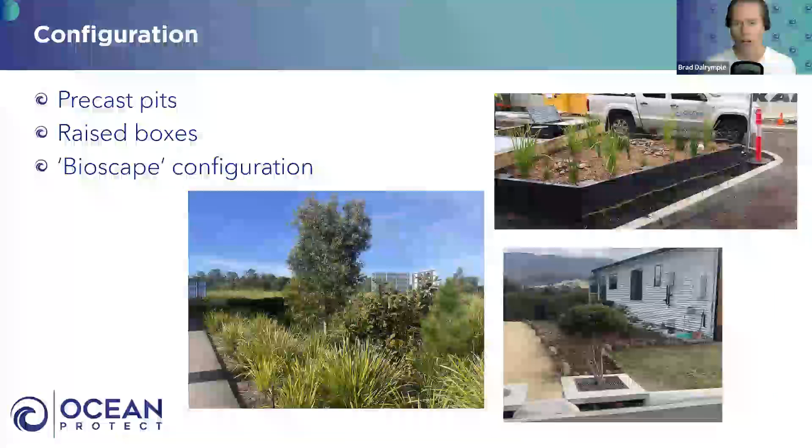But yeah, key difference is fundamentally they're just smaller, 3 to 5 times smaller in general. In terms of application, basically wherever you'd put conventional bioretention systems is more or less a suitable site for Filterra bioretention. There's just some examples here, and I'll show you some more in a sec. Configuration - like I said, there's the tree pit systems, the bioscapes. We also occasionally do a sort of raised box as well.

So fundamentally, most councils across Australia allow their use, at least on private sites, and several allow them to be used on public sites as well.

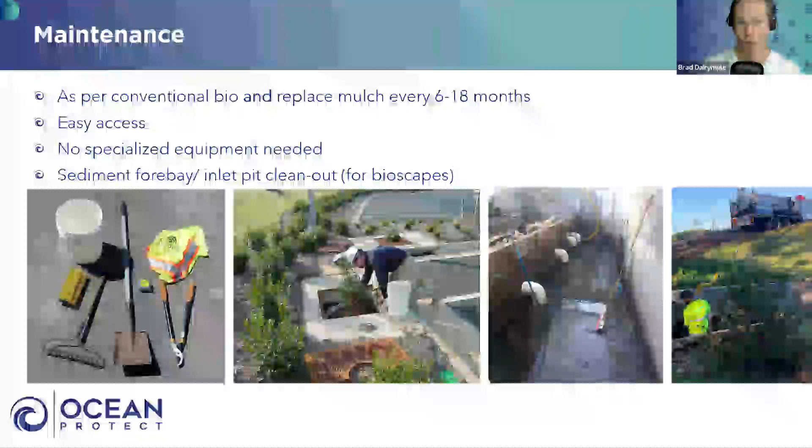In terms of maintenance, it's really quite simple - in fact, I'd say it's actually easier to maintain than conventional bio. And again, I'm biased, but firstly, they're smaller, so the work area is 3 to 5 times smaller. They're generally easy to access, but you don't need any specialized equipment or Ocean Protect involvement to maintain these assets. They can be done by any suitably qualified people.

The key maintenance activity is basically just giving the mulch a replacement. We recommend that every 6 to 18 months, but again, it rarely happens that frequently, at least.

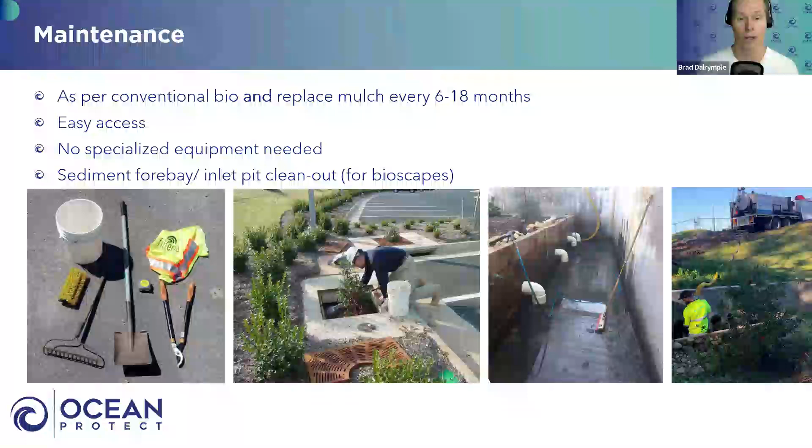And giving the vegetation a bit of a haircut as well. I'll show you some examples of what that looks like in a sec. Obviously, I don't know anything about haircuts - if you need the back of my head as an example.

In terms of case studies, there's a lot of them now, over 200 in Australia. But it's worth noting this isn't new technology - Ocean Protect have been doing it in Australia for about 6 or 7 years, but in the States they've been doing it for about 15, 20 years, and there's a lot of systems there. I'll show one at the end.

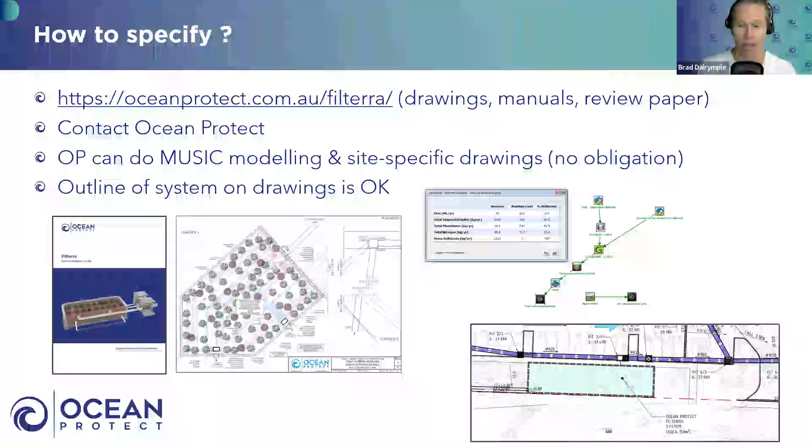So that's a crash course in what Filterra is, but I always like the proof to be in the pudding. I far prefer showing real world examples to give you guys a better feel for what these systems look like and how they function. So I'm going to start with the older systems first.

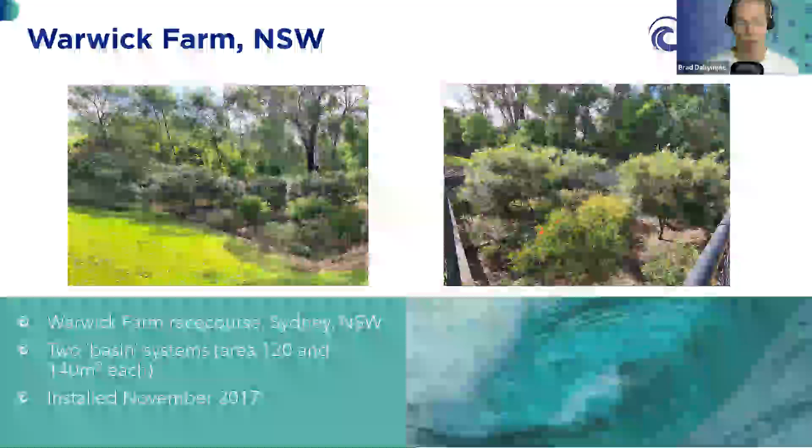Warwick Farm, out of Western Sydney - these were the first installed in Australia, nearly 8 years ago now. There's two of them, 120 and 140 square meters.

Planted out in January 2018. A couple of years later, these plants have just grown and grown and grown, and this is what it looks like very recently. I might zoom back because you can't actually see into it anymore due to the plant density.

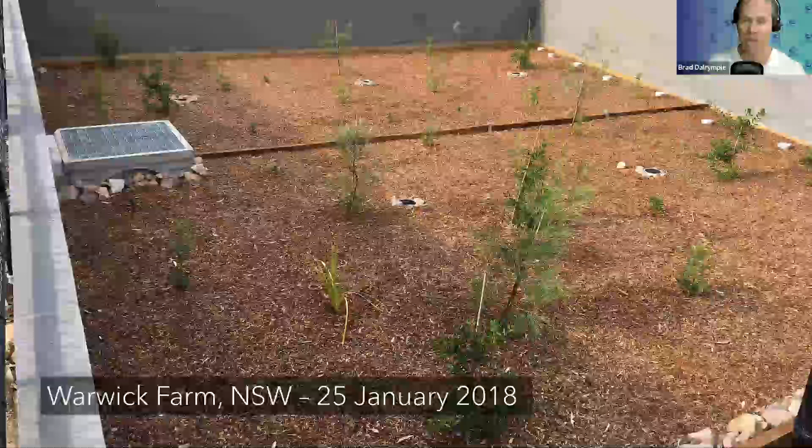Generally we prefer a combination of small plants like grasses and trees, and the planting density is lower than conventional bio systems. You can see here, the planting density generally doesn't go more than about 1 plant per 4 square meters, and there's a bunch of reasons for that.

Number one, we have very little plant die-off in our systems. Number two, we like to give the plants room to spread out and grow. And number three, we want to get in there and have the ability to remove the mulch and put new mulch down.

Having said that, I don't believe this one's actually had any maintenance for several years, but again you can see the plant growth - it's pretty high. So plants are living their best life.

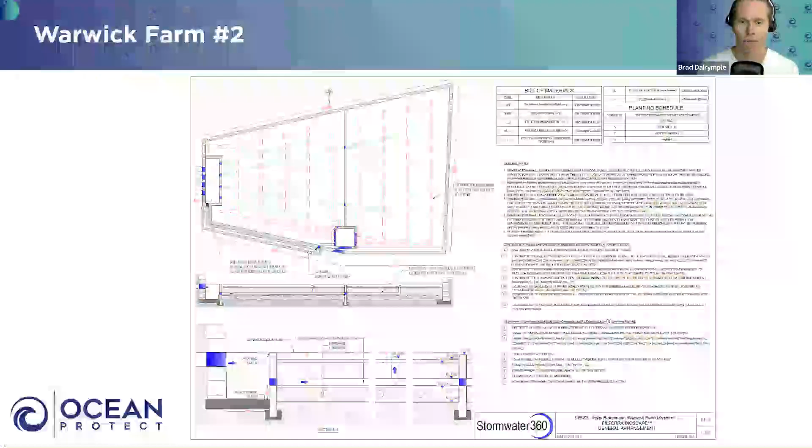This one has actually been hammered, not from stormwater, but floodwater. This is right next door to the Georges River, which overtopped in a flood event and deposited about 1 foot of mud across the entire mulch.

The maintenance intervention was really just removing the mud and removing the mulch. We did a hydraulic conductivity test and showed that the system was still draining really, really well. This highlights the importance of that mulch layer to help protect the system and maintain its longevity. Again, some of these trees are just pretty impressive.

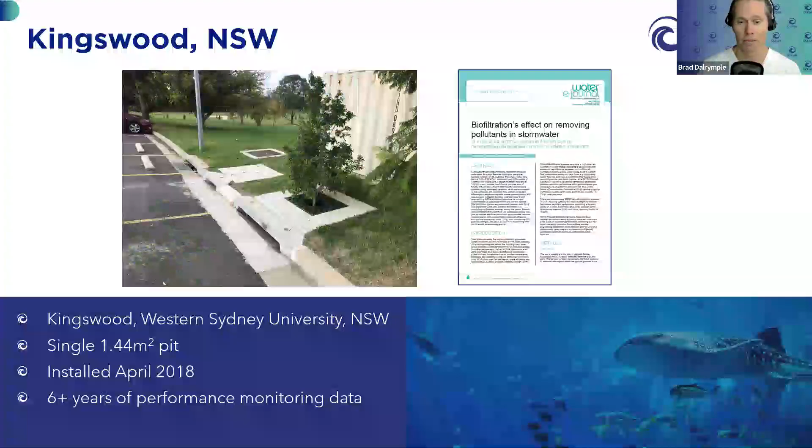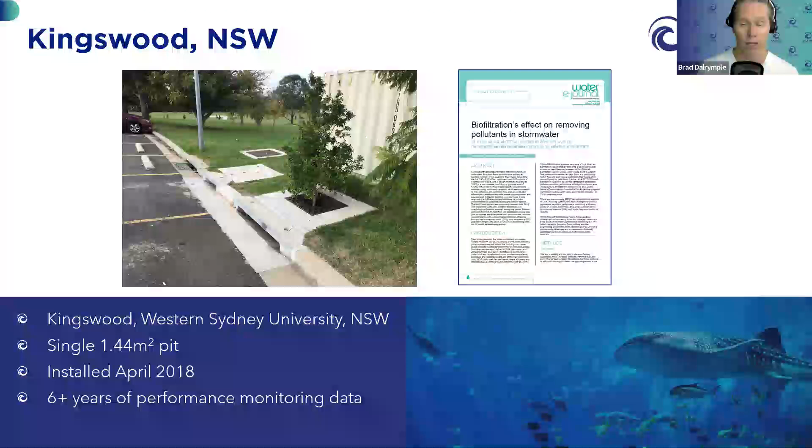It hasn't really had any maintenance apart from that flood recovery. Kingswood, this is a system that's been in the ground for over 7 years now. This is one we've done a whole bunch of performance monitoring on. We've monitored this for 7 years now. This is one we submitted for SQIDEP approval, and it's had study results published in the journals. But fundamentally, this is what it looked like when we were installing it.

That is the Filterra bioretention system. There's a little cutout in the curb there, and you can see water just drains into it, just like a streetscape bioretention system. In that cabinet, there's a whole bunch of fancy monitoring equipment.

In terms of maintenance, I like showing these photos because it shows you what maintenance looks like. When we remove the mulch, the key reason we do that is because that mulch will capture a lot of silts and fines that can otherwise block the filter media. It also has a whole bunch of pollution, which ideally we don't want just sitting in there forever. So ideally we remove that mulch and place new mulch down. You can see here the tree has got a bit of a haircut as well. Just to give you an idea of a small scale maintenance intervention.

And that's still going gangbusters. I think we're still monitoring that 7 years down the track. These are some of our bigger systems, and these probably are getting more and more common. These were installed about 5 years ago.

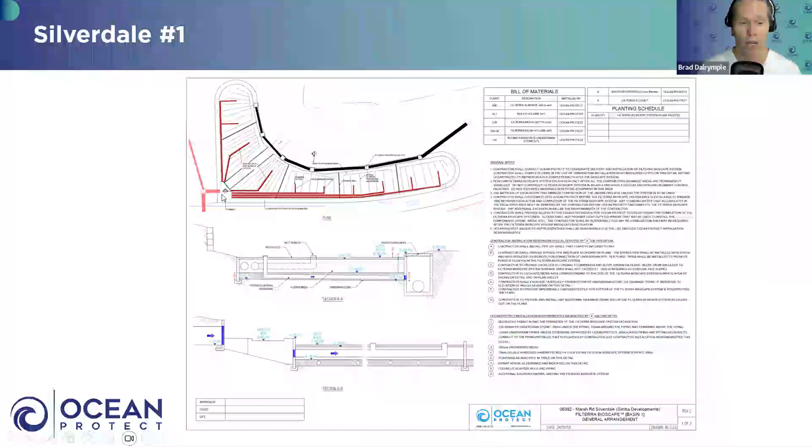Design drawings, again, done by Ocean Protect. You can see some of the features here. This is a 500 square meter system. You can see that this is a bioscape separated into individual cells, generally less than about 9 square meters. The red lines show the bubble up flow distribution points. This is a coarse sediment forebay to help mitigate sediment loads, and this little channel here is the high flow bypass as well.

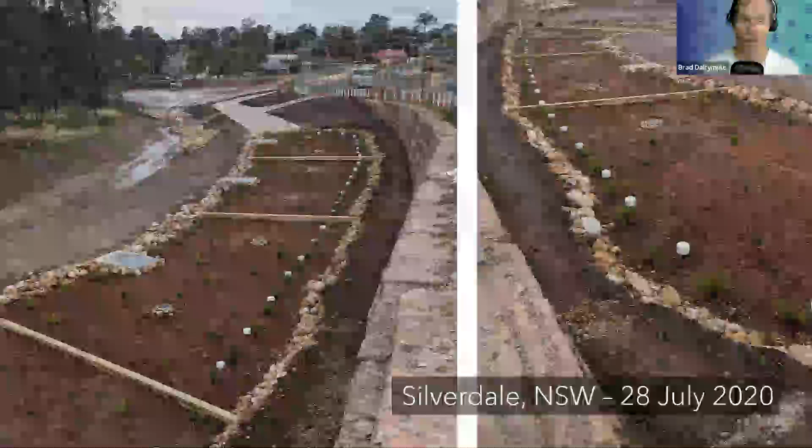Just to give you some photos of what they look like day one - so this is day one installed. You can see overflow pits, the bubble ups, dividing walls, flush points, the mulch, plants, and over time. Keep in mind, this was originally specified as a conventional bioretention, 5 times bigger than what the Filterra ended up being. The developer went with Filterra because it meant he didn't actually have to cut down a whole bunch of adjacent bushland as well. Over time, this system's just grown and grown and grown and grown. You can see the bushland over here that was basically stopped from being cut down because the Filterra was so much smaller.

You can see here some of the features: bubble up points, overflow pits. This is the high flow bypass, and this also shows the plant density. We planted 1 plant per 4 square meters on this system. Conventional bio, you're often looking at 6 to 8 plants per square meter - so the density here is substantially lower.

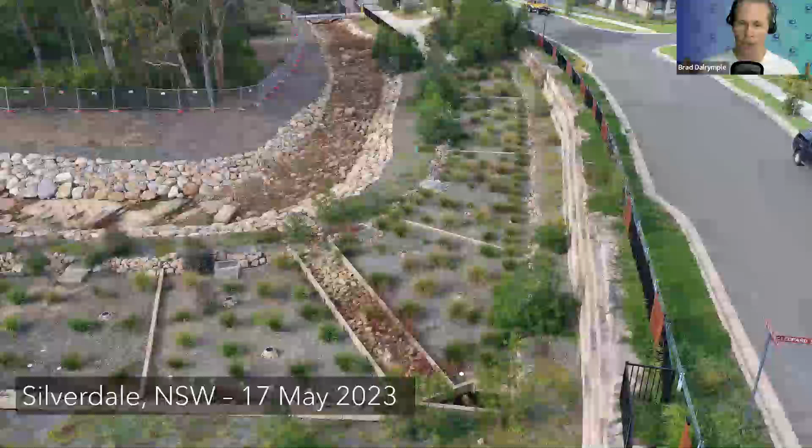You only appreciate that if you get an aerial photo, but if you actually look from the side, you can see the planting density is actually probably, visually, still quite dense. The plants have had very little die-off, I'd say almost zero. In fact, some of these plants are actually self-seeded - that tree we didn't plant, that's just come in from, I don't know, a bird dropping a seed somewhere. You can see what 1 plant per 4 square meters looks like. It basically gives the plants plenty of room to spread out, but equally, if someone wanted to get in there to replace the mulch, they could.

This one is - and I know Alan West from Kingston Council, I saw you dial in before. Greetings, Alan. Alan's the champion of this project. Kudos to Alan for trying something new, because I know Filterra is a new thing in Victoria.

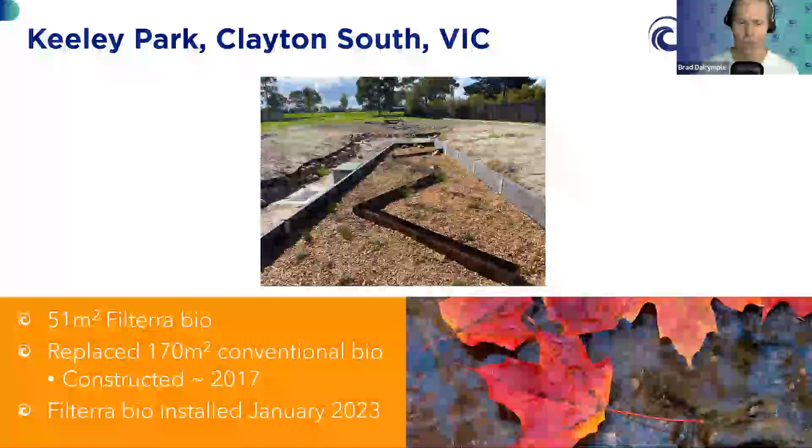Alan obviously heard about Filterra, and long story short, there was a conventional bioretention system that had been installed that just wasn't operating as well as Kingston Council would have liked. It had only recently been installed - I think it was installed in 2017, but a few years later was really struggling with some operational issues. So Alan and Kingston City Council took the initiative of trialing a Filterra bioretention system. We basically took the 170 square meter conventional bio and used a portion of that, about a third, 51 square meters, and made that the Filterra, and the rest was just landscaped.

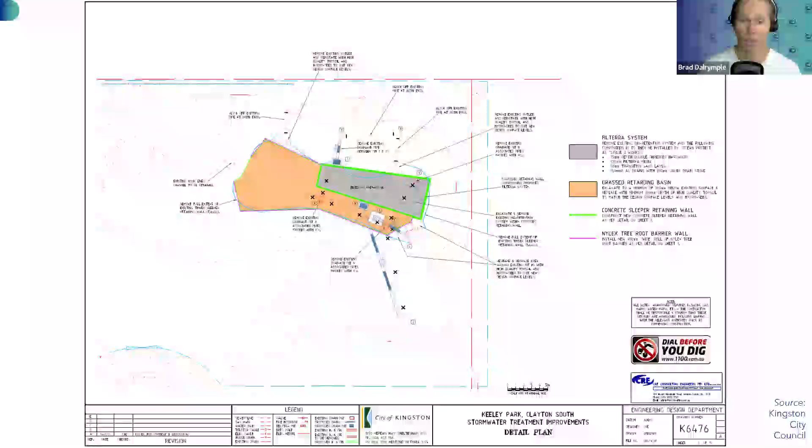This gives you an idea of just the construction - this is kind of what we do.

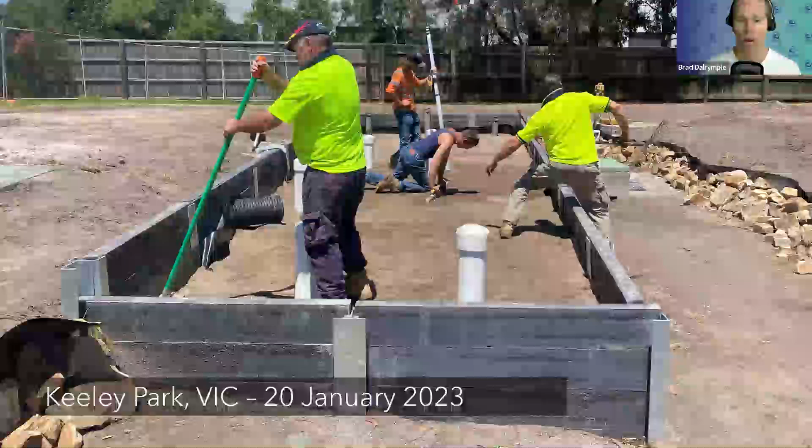So as part of any sort of system, we get in there and actually design and install it ourselves with our own crews. That's day one. In 2023, and this is a little bit later — fundamentally, Alan and Kingston Council preferred the trough flow distribution system, modelled on the conventional bio-system in the Edinburgh Gardens in Fitzroy.

This is just another way of getting flow across the surface of the bioretention system. Instead of a single inlet, we're trying to distribute water across the system, like we often see with conventional systems, really trying to maximize the full treatment extent. You can see in the background all this adjacent area is used for landscaping. Looks great — a great project, with more to come.

The water is treated and then used to irrigate the adjacent sports fields, which is great — there should be more of it. Well done to Alan and Kingston Council and the Ocean Protect guys involved in that project.

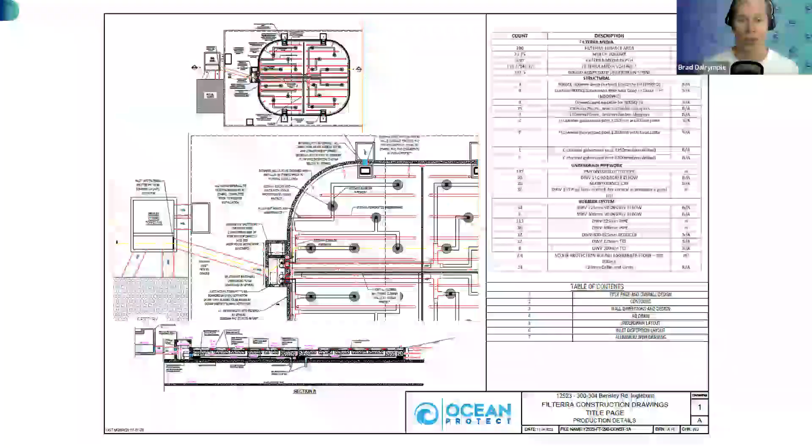This one's a bit different — installed in 2023. This actually sits on top of a detention tank, so water basically drains through the Filterra system and discharges directly below it into an underground detention tank. I like this photo because it shows the system getting built, with all the different stages of the Filterra bio installation visible.

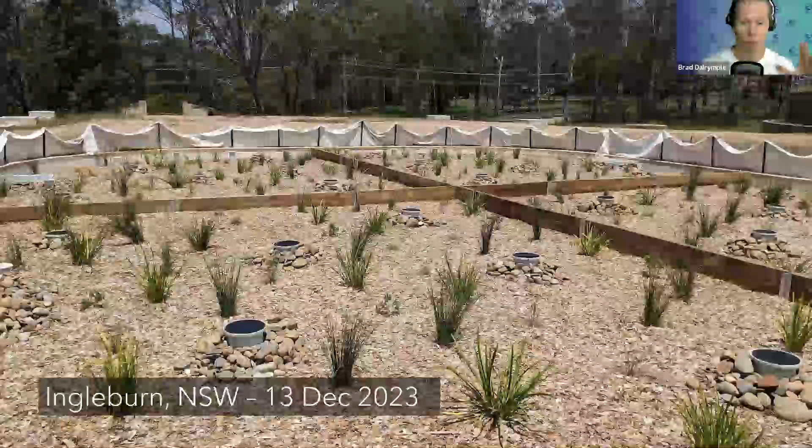We haven't actually brought this system online yet because the upstream catchment is still undergoing construction. Again, that's a great advantage of having these systems offline — we can ensure the system is protected from incoming sediment loads that can otherwise damage it, which we see in conventional systems. This next one is hot off the press — brand new.

This is a really interesting one in Littlehampton, South Australia. It's 120 square meters, and it treats stormwater but also treats recirculated lake water. There's an adjacent lake as part of the development, and to help protect lake water quality, the plan is to recirculate lake water twice a week for about 4 or 5 hours each time — so about 8 or 9 hours of pumping weekly, just keeping the lake turned over. That water goes through the Filterra bioretention system to help protect lake water quality.

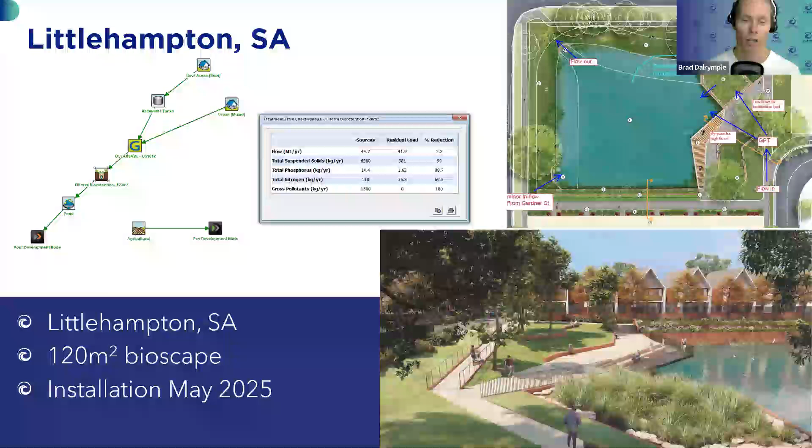But if it rains, the Filterra system also receives and treats incoming stormwater from the upstream catchment. It's actually modelled on a system we trialled that's still operating on the Gold Coast, installed back in 2018, which was purely treating recirculated lake water — and it's still going strong.

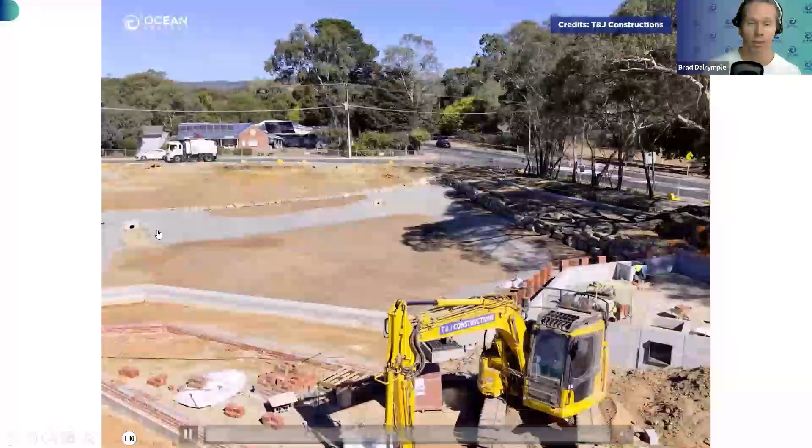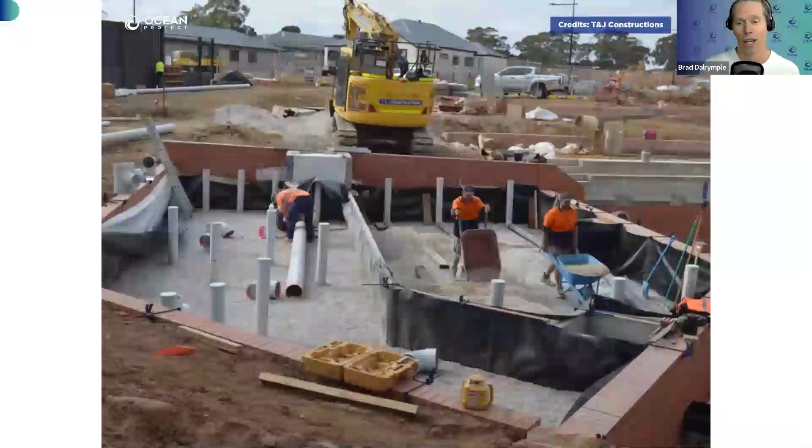This is some fancy footage from the construction — not sure how well it will come off on the webinar, but you can see what the guys do: installing the gravel, the under-drainage, the bubble-ups, the filter media, and the plants. Again, this is offline while upstream construction activities are still happening. That's day one, and the lake hasn't even filled up yet — a really cool project, and it'll be interesting to see how it evolves over time.

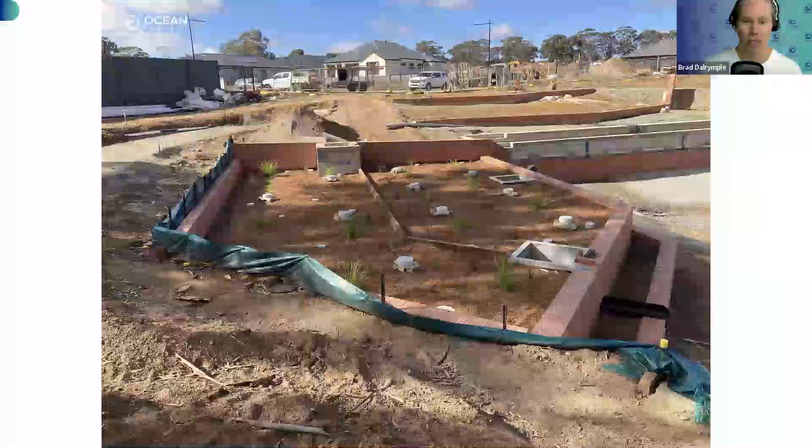A couple closer to home now — these ones are a little closer to my heart. Number one, because I helped build them, and number two, because I check on them every so often.

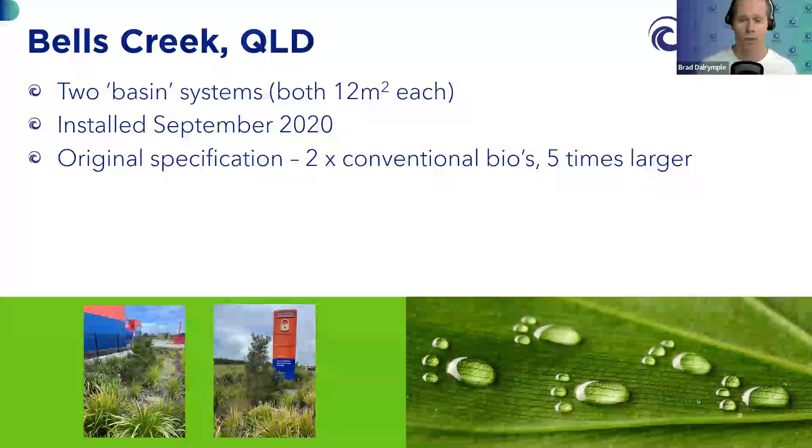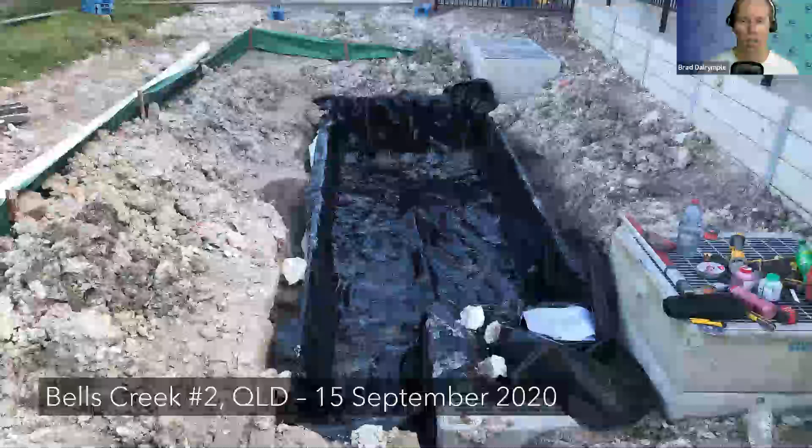Here's the install crew coming through and essentially installing the system — this is basin number 2, putting in the liner, the gravel, and the filter media. That's day one. So that's it — what's that, nearly five years ago now? Keep that image in your head.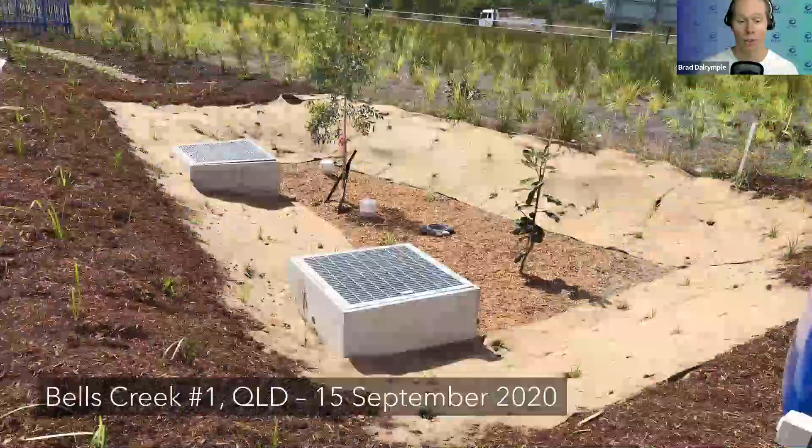This is the second system out there. Again, day one, and a few years later, and now 5 years later, the plants are really well established. So that's it, day one, and a couple 5 years later, the plants have grown up really nice and tall. So the key thing for me is that plants love growing in Filterra bioretention systems.

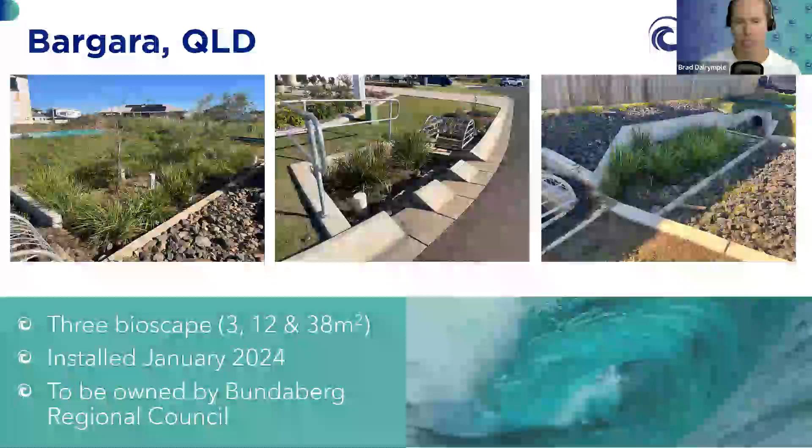A little bit further up the coast near Bundaberg and Bargara, beautiful part of the world. These will be handed over to Bundaberg Council. So these are three little systems, and it gives you an indication of the different types of Filterra bioretention systems. One's a bigger bioscapes - that's it, day one installation.

And that's it, a year later. Again, still offline because the upstream construction activities are still happening. And then we've got these two smaller systems as well that have been brought online and are receiving flows. This one, the property owners actually integrated a nice little garden bed adjacent to the Filterra, which is pretty cool - that's the garden bed in the top right there. We didn't plant that one out, but it looks cool.

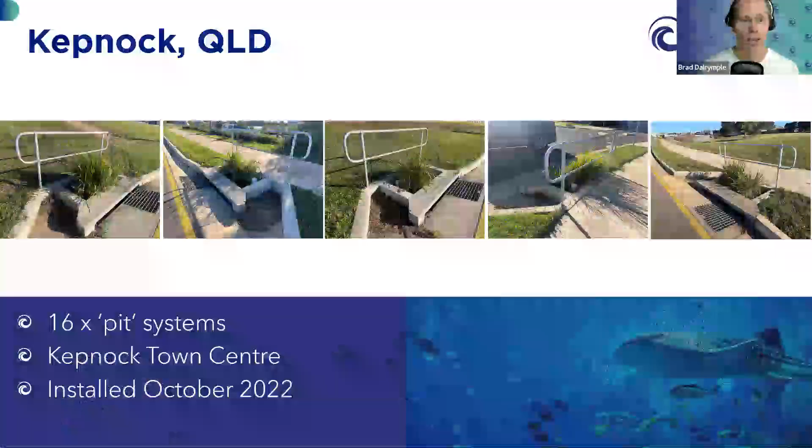Kepnock, just very close to the Bargara systems - these are just 16 individual systems, like little pit systems integrated into a town centre to help protect the water quality from a busy little shopping centre precinct.

These are really new - again, these were installed recently. This is the biggest ones we've installed to date in Queensland. Two systems, 192 and 296 square meters. I did the calcs - they were going to be 4.2 times bigger if it had been a conventional bioretention, and they physically just couldn't fit in.

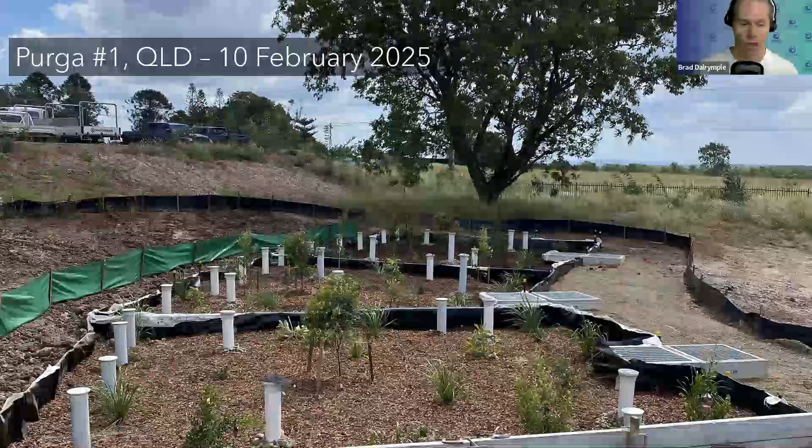So this is it, more or less - this is the first system, basin one. Day one install, so the bubblers and plantouts hadn't been cut back, and that's a little bit later on, and that's just a couple of weeks ago. This is getting a lot of flow - they're actually heavily saturating the upstream catchment, so this is getting pretty much a lot more flow than we actually anticipated, but the plants are growing really well.

This is the second system, just under 300 square meters. So again, day one installation, and more recently activating the system and bringing it online. Again, diversity of vegetation, shrubs and trees - pretty much the same planting palette that you'd put in a conventional bioretention system.

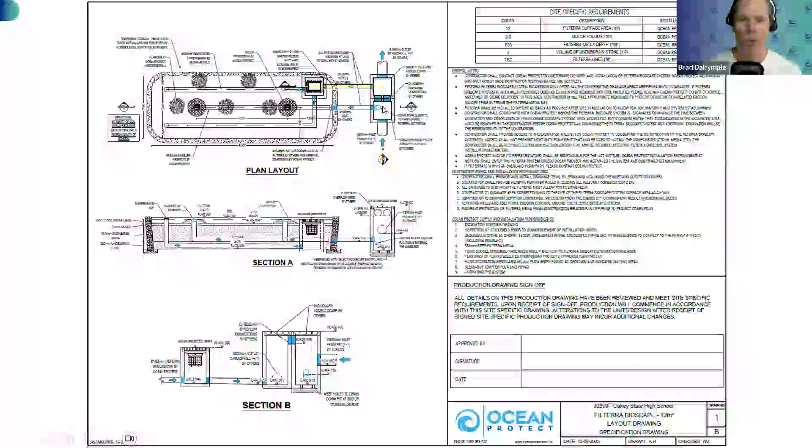This one, I reckon, is my favorite - it's a 12 square meter system at Oakey State High School, so hopefully the kids get a kick out of it. But again, design drawings give you an idea of how it works. Water comes in, hits a little weir, bubble ups distribute the flow - these are the little bubble ups. These are the under drainage here, which drain into a downstream pit.

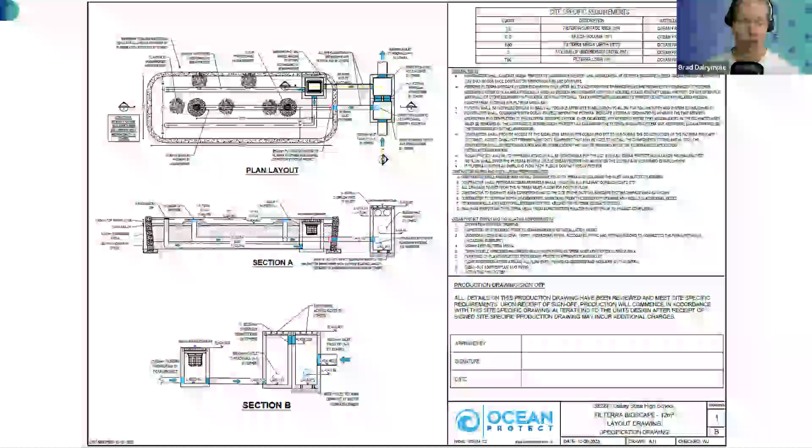If the water gets too high, they spill over into the overflow pit. You might see for our bioscape systems, we do put a gully pit basket on these overflow pits just in case, because there's always a concern that the mulch is going to float. Just a reminder, the mulch we use is a double shredded hardwood mulch - we do prefer it because it has low floatability and low nutrient leaching. But in case for whatever reason it does float, we put the gully pit basket on the overflow pit. I've looked down a lot of gully pit baskets on overflow pits, and generally it's just leaf drop from the adjacent plants, not mulch at all, if anything gets caught in there at all.

But fundamentally, this is Oakey, day one, February 2024, and I just checked it out very recently, and that's what it looks like more or less now. So day one, a year later, and again for me the key message is plants really like the Filterra bioretention environment.

We generally get asked how big are the biggest, for whatever reason. This gives a summary. I haven't showed the biggest to date - we actually just installed it a few months ago in Sydney Metro.

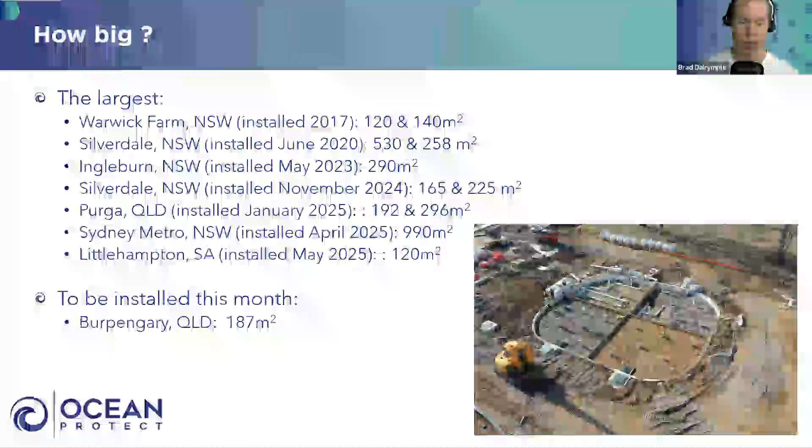So that's our biggest to date. The biggest being 990 square meters, so just under 1,000 square meters. And to the best of my knowledge, it is the biggest in the world. And we've obviously installed a whole bunch of other pretty big ones as well. Literally this month, as we speak, we're installing another one just up the road from me in Burpengary, in the Moreton Bay region.

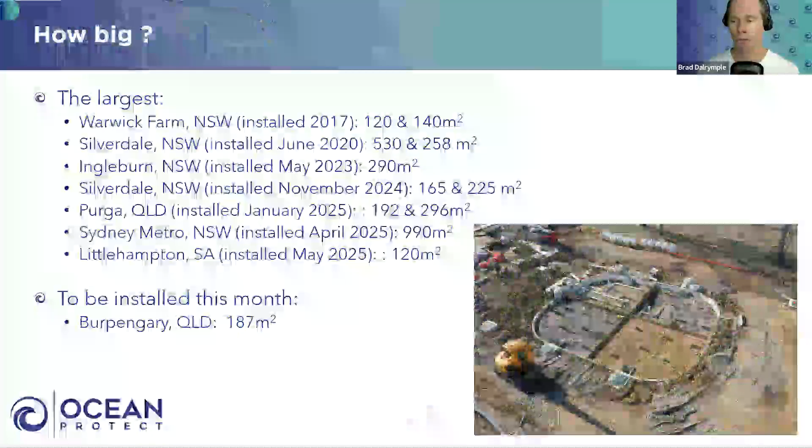Also, regarding plants with high flow media, does it retain enough water to keep plants watered? Shin Lee, that's probably the main concern we've had from people before we actually started seeing these systems in the ground and basically thriving. So long story short, hell to the no. Whilst the Filterra system does drain really well, it's also really good at retaining moisture within the filter media. There are two key reasons for that: number one, we use the mulch layer, and number two, there are organics in the filter media and other properties that help retain moisture. We do use a planting palette that prefers dry-ish conditions, but there's certainly enough water retention in the filter media to keep the plants very happily surviving.

Sean Quilty, legend of the Quilty Engineering Hub and esteemed TAFE lecturer. I feel like I'm your biggest fan, Sean, but maybe I am.

Greetings, Sean. Great to see Bundy Council taking on proprietary assets. Are there any fact sheets available to pass on to other councils? If you ever need info on this, just email me. The key thing is that review paper on our website, the one I referred to earlier. That has all the information anyone would need to know about Filterra, including answers to a whole bunch of frequently asked questions.

Question from Simon Blackwell: any projects in WA? Not yet, Simon, but if you are in WA, give us a shout. We'll certainly consider it. I think the furthest west we've gone is Adelaide, just for the time being. But give us a few years, who knows?

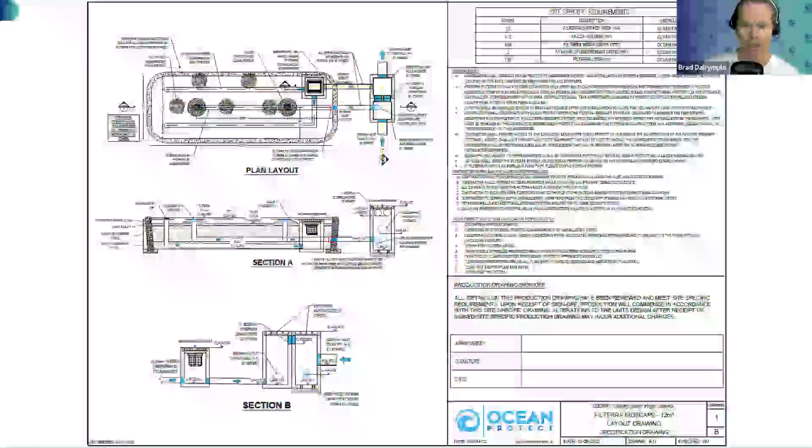So how these essentially work is we want to distribute flow across the entire surface of the filter media. Most conventional bios just have a single inlet, and there's this sort of hope that water just magically dissipates across the entire surface. I think that's a real misplaced hope.

How we maximize the flow distribution of water in Filterra or high flow bio is either bubble ups, which I'll show you a whole bunch of examples of, or this trough arrangement. Basically, we're trying to get water to spread across the entire surface.

So water will come into this main channel, and you can see these little cutouts here - they're basically little slots or gaps on the sides of the channel. That means water can physically get out and go along the length of the channel and come to the end and dissipate. So it's basically a flow distribution system. The main flow goes along the channel, but every so often there's a cutout, and these other channels spread the flow further. You can also see little cutouts in the main channel where we're looking to get water out as well. Hopefully that answers your question.

Robert Nutt asks, do you have any examples used in agricultural areas or around waste facilities, green waste? No, I haven't got any I can show you. We haven't done any for agricultural areas, but for waste facilities - I'm trying to think, it's like a composting facility - we are designing one, not sure if it's being installed anytime soon, but that is happening in New South Wales. I can provide further information if you'd like to know more, Robert. But yeah, it's more or less the same thing - we're careful about too much pollutant load going into these systems, with pre-treatment etc.

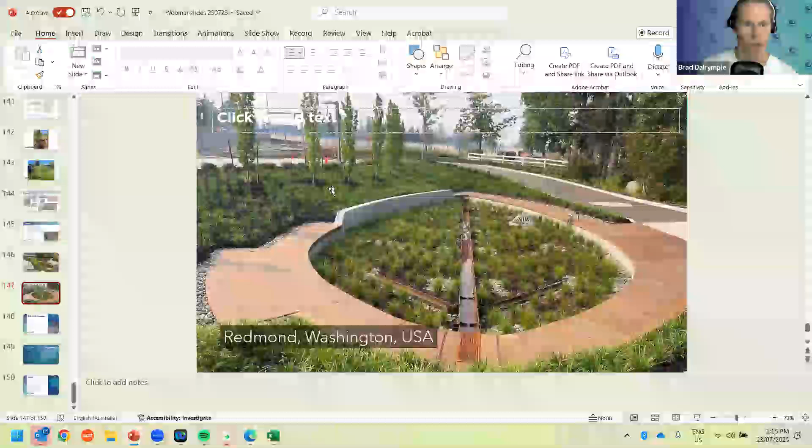This is something we're not flexible on at all currently. If I backtrack a little bit, if you're wondering what we're talking about, let me show this figure right at the start - where is it? This one.

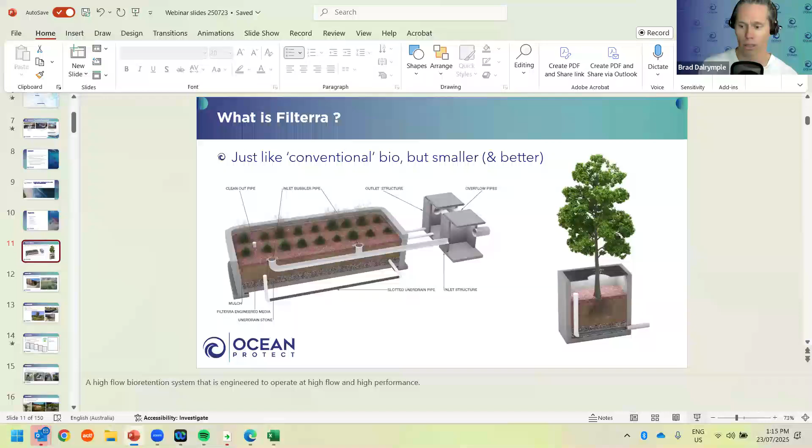The questions are in relation to the depth of the filter media - so the filter media being this section here. For Filterra bioretention systems, that depth of filter media is 530 mm. That is the minimum and the maximum - there is no variability, at least for the time being in Australia. We generally find that is the sweet spot in terms of optimizing performance, reducing costs, etc. All our performance monitoring data is associated with the 530 mm depth of filter media, so that is the golden depth. Clearly it's deep enough to sustain big trees and still deep enough to achieve really good rates of pollution removal as well.

Question from Jude - Jude asks, does the bioretention system slow down runoff, reducing peak flows to downstream catchments? Absolutely it does. We see this in our flow monitoring data, not just for Filterra, but conventional bioretention systems as well. They definitely slow down flow, and they also can retain a fair bit of water as well.

A question from Hamid Tabakoli: is the only proprietary product the filter media, or are the pits proprietary as well? No, you can get your pits from anywhere. The only proprietary component of Filterra bioretention systems is the filter media, and again, you should never have to replace that. After we've handed it over and activated it, which we always do at least a minimum 12-month period after installation, you should never need us ever again. Having said that, you'll probably see my buffhead every so often taking photos of it and checking it out, even after many, many years.

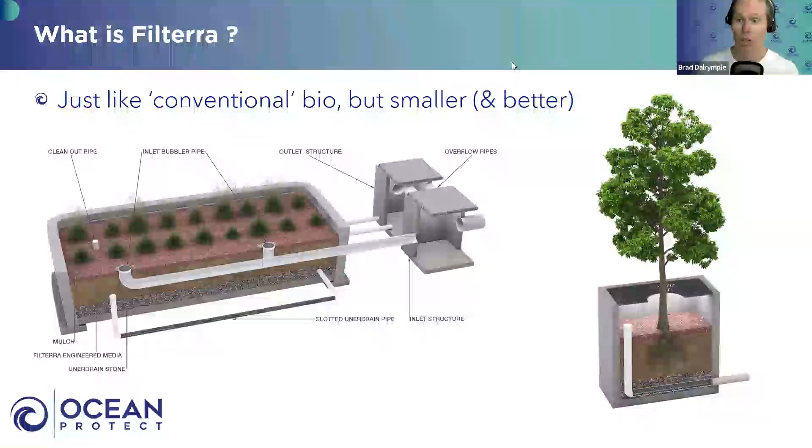Great question, might be easier if I look at a picture. As an example, let's look at Silverdale, might be the easiest one to visually look at. This is ballpark figures, and it does vary from location to location, but I'm being put on the spot, so I've got to answer it. Systems that are more than 100 square meters or thereabouts, we're generally looking at about $1,250 a square meter for the design, installation, and the first year or so of maintenance.

Now, the ballpark estimates I get around conventional bioretention systems really vary, generally somewhere between $500 to $1,000 a square meter. That generally doesn't include the first year of maintenance, but that aside, we're roughly $1,250 a square meter, while conventional bio is 500 to 1,000 thereabouts. I'm sure someone will say it's different, but that's just ballpark. So per square meter, we are more expensive generally.

But the key cost saving is the fact that we're 3 to 5 times smaller. So whilst we might be more expensive per unit area, we're generally cheaper in terms of installation, and that's just purely looking at the Filterra bioretention system. Generally with the Filterra, because we're smaller or easier to integrate, we don't need the deeper, more expensive retaining walls, and we generally gain back space. In this case for Silverdale, that meant we didn't have to knock down a whole bunch of trees. But for a lot of our projects, we're finding developers getting back another lot or two.

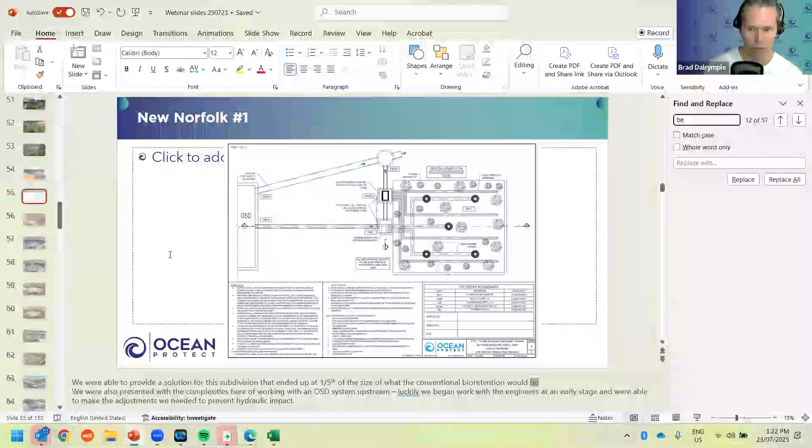So even though the Filterra bioretention system is generally cheaper, we don't include any sort of cost savings for the developer or council in that number. But keep in mind, there are exclusions. As per the Bells Creek example I showed you before, let me bring it up just so you know what we do, in case you missed it. Where is it? I'm just trying to find it, give me a sec... Bells... oh, I can't find it.

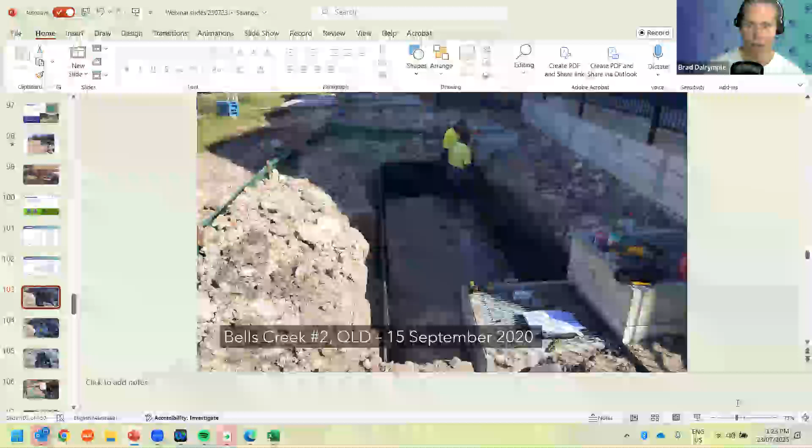So to give you an example, where is it, here we go. This is kind of where we step in. Our cost of $1,250 a square meter doesn't include excavation or any sort of external infrastructure like pits or upstream pipes, etc. If there's a structural retaining wall, that doesn't include us. We basically do everything within the perimeter of the filter media, that's generally where we start and finish. So for systems bigger than 100 square meters, it's generally about $1,250 a square meter. For smaller systems, the costs do increase per unit area, but again, if you're keen to get a price, just reach out.

What I'm generally doing most days is, as part of any design, we provide a cost estimate, and I also provide a cost estimate of the conventional bio option as well, which I can model quite easily, doing a cost assessment based on some approximate numbers.

Another question about longevity: what is the typical design life of the system? It was noted that timber sleepers divide the walls and would need replacement more frequently. Actually, we rarely use timber sleepers anymore. They're really just a nominal boundary, generally to help with construction, so we're not relying on them to last forever at all.

In terms of the design life of the system, the advice is based on bioretention monitoring of systems that are 7 years old now. The systems are generally getting better with age. There's data from the States on systems that are 13 to 14 years old, with no deterioration of performance. So long story short, we're confident the design life of these systems should be essentially in perpetuity, provided they're appropriately designed, installed, and maintained.